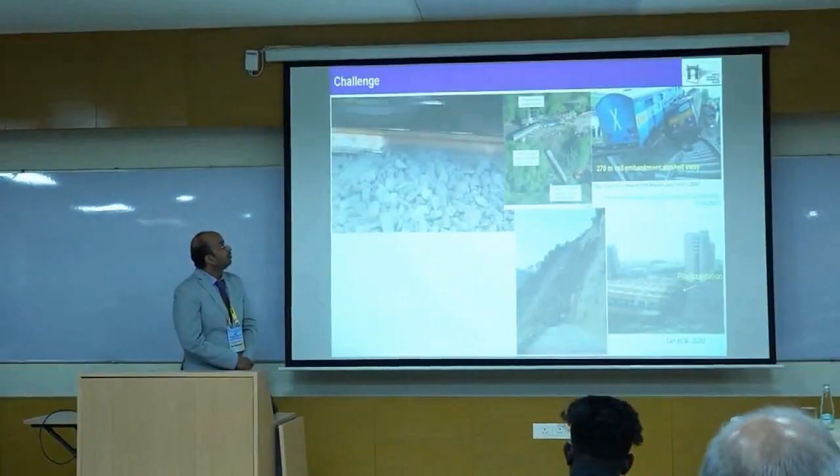There are several challenges when we look into the field related to geoinfrastructure. As you see, when the train is crossing, and here we have the ballast which is fouled, the subgrade soil is subjected to deformation when the train is moving. Similarly, because of heavy rainfall, there was a derailment of Kamayani Express, and there were so many problems that happened in recent years to the performance of various linear infrastructure.

As you can see, because of heavy rainfall, there was a collapse of this particular building where the pile foundation is exposed, and coming from Himachal, we received a lot of landslides, and the frequency of landslides has increased in recent years. We have seen this year as well as in 2023, and these years were never before, when we compare the intensity and frequency of landslides which has increased.

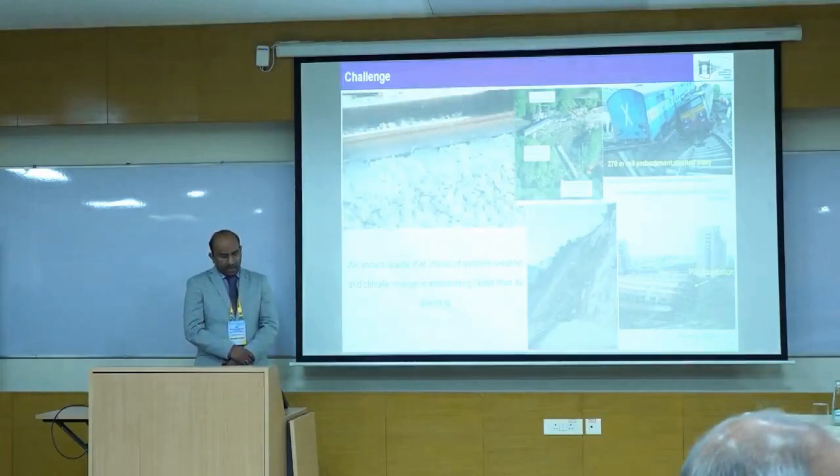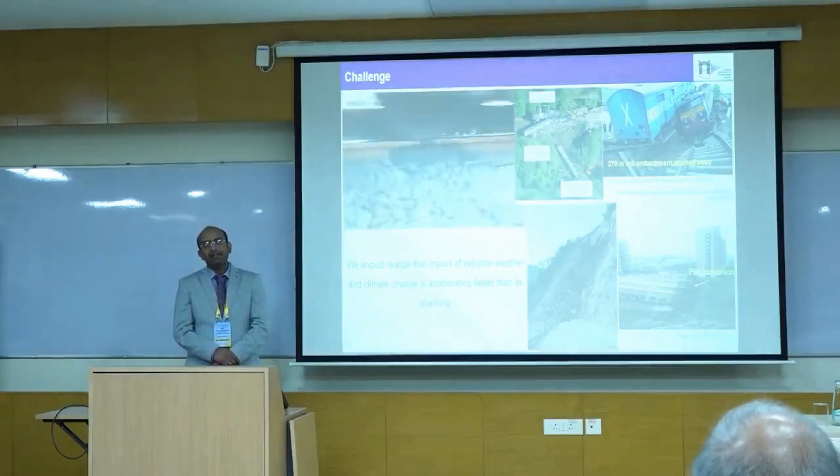So we should realize that the impact of extreme weather events and climate change is accelerating faster than its planning. Therefore, we must incorporate hydraulic loading while designing geotechnical infrastructure.

The way to include it would be through suction, which is the negative pore water pressure present within the soil particle at its contact when the soil is present in an unsaturated state, which is mainly the difference between air pressure and water pressure, when water pressure is lower than air pressure.

It is represented in terms of soil water retention characteristic, as you can see over here, which is the relationship between degree of saturation, that indicates the amount of water present within the voids of the soil, and soil suction. The property of it is highly variable, meaning it depends on how soil is subjected to wetting and drying.

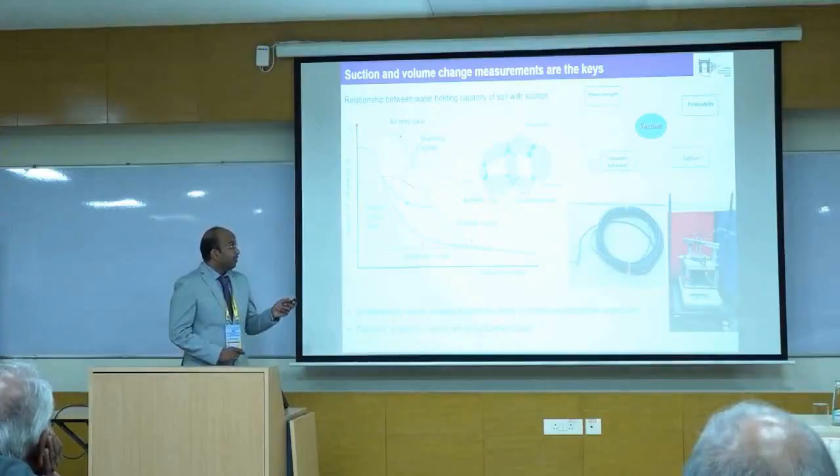Because this particular property of soil, which is suction, affects the strength of the material, its water holding capacity, its volumetric behavior, as well as stiffness, the infrastructure performance gets affected when the soils are present in an unsaturated state and subjected to wetting and drying phenomena.

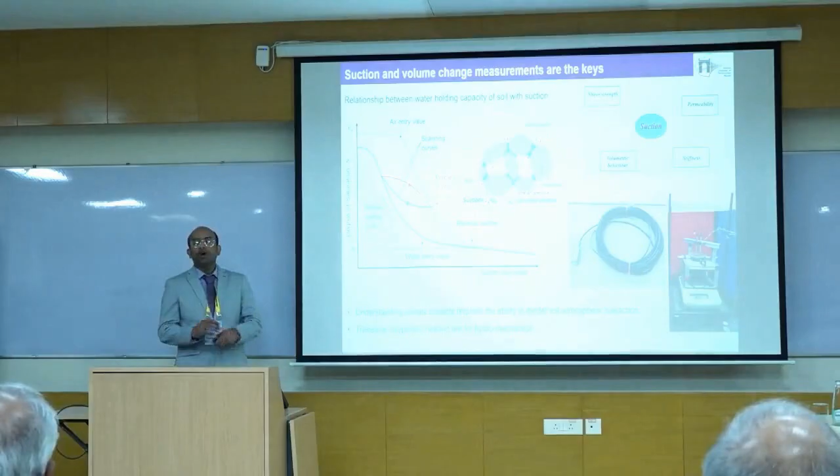The way to measure it would be through this device which is called a tensiometer. This is the device rig that we have developed in our laboratory, aiming to understand the volume change characteristic of the material and measure suction, then represent it onto this space to understand its engineering behavior.

In order to first understand how material behaves under wetting and drying phenomena, combined with the loading that comes because of traffic, for the linear infrastructure it can be mechanical loading, in terms of monotonic and cyclic. We devised the testing protocol where we kept a tensiometer onto the sample, then subjected the soil to different cycles of wetting and drying, and then applied cyclic loading to understand the performance of subgrade soil.

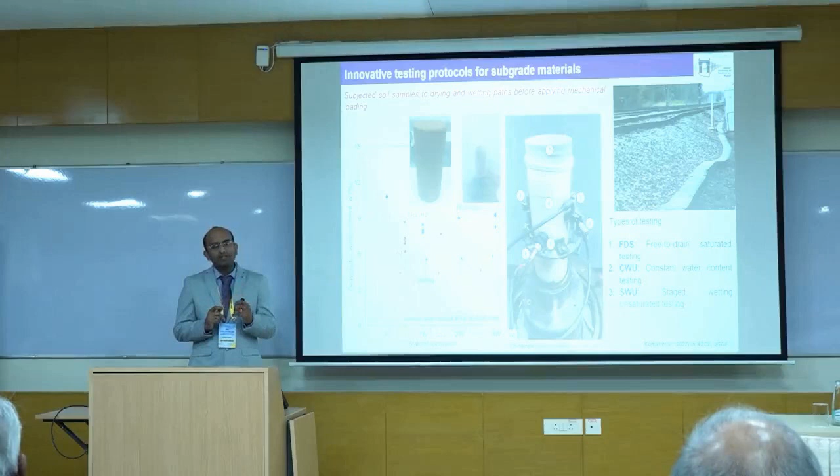We subjected the sample to different levels of hydraulic loading. First was free to drain loading, meaning the samples were fully saturated, voids completely filled with water, and then we applied mechanical loading. We applied another case where we subjected the soil to a constant water content and applied mechanical loading. Then we simulated another condition where we injected water and applied mechanical loading, simulating the condition when rainfall is happening at the same time the train is moving onto the pavement.

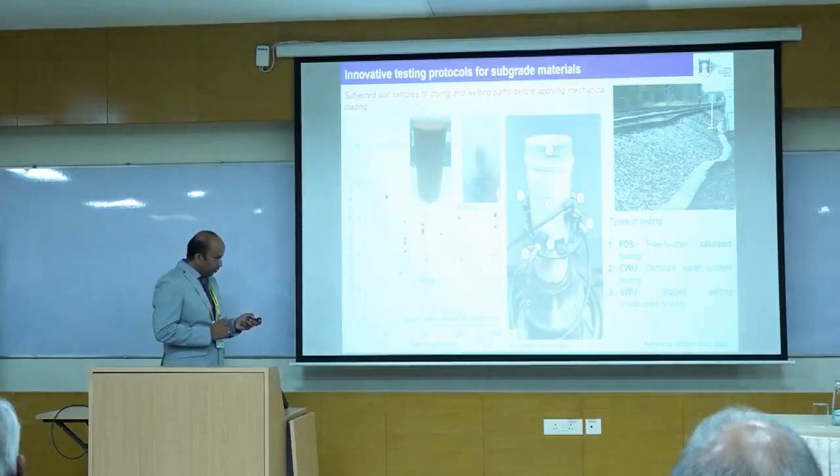With the help of this, we were able to understand that the suction characteristic, which is the governing characteristic of material strength, is not able to fully capture the material behavior. We need to consider the stages of hydraulic loading and how the wetting and drying path is applied. As you can see, when the sample is subjected to different drying and wetting paths, the samples behave differently. This is the result of cyclic loading.

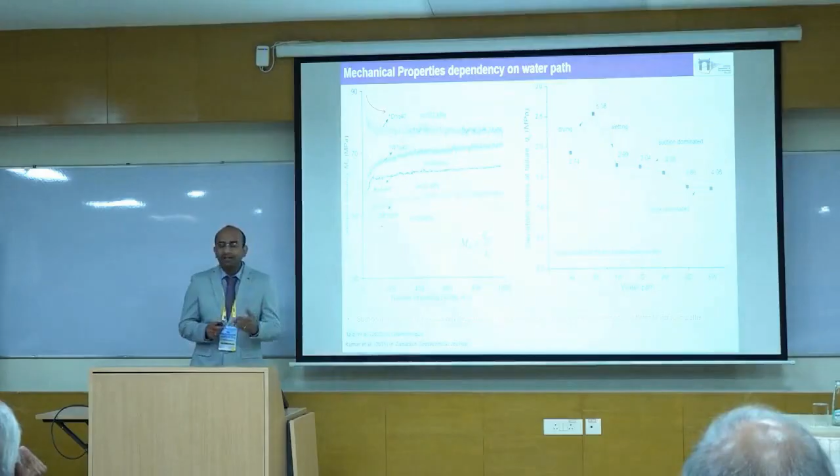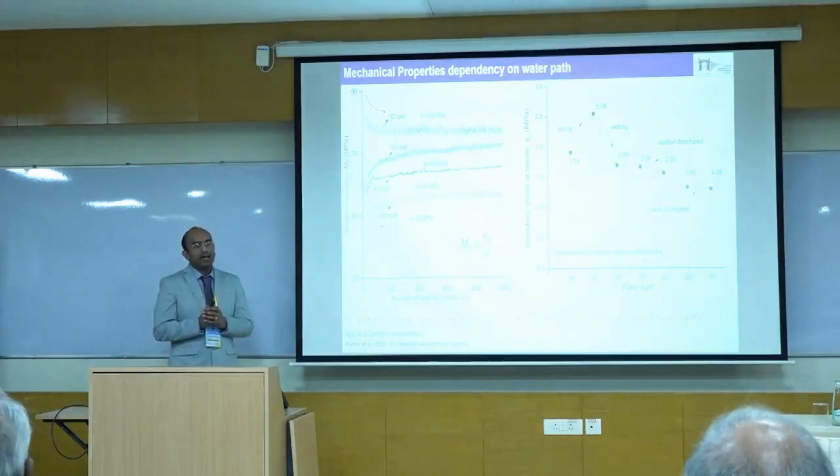When we apply mechanical loading, in terms of monotonic loading, we observe that the sample, when subjected to higher hydraulic path, develops cracks, and this eventually came up in terms of evolution of its deviatoric stress, so it affects the behavior. We need to account for both of these conditions, and we understood that cycles of hydraulic loading affect the behavior of material, whether subjected to monotonic loading or cyclic loading in terms of mechanical loading.

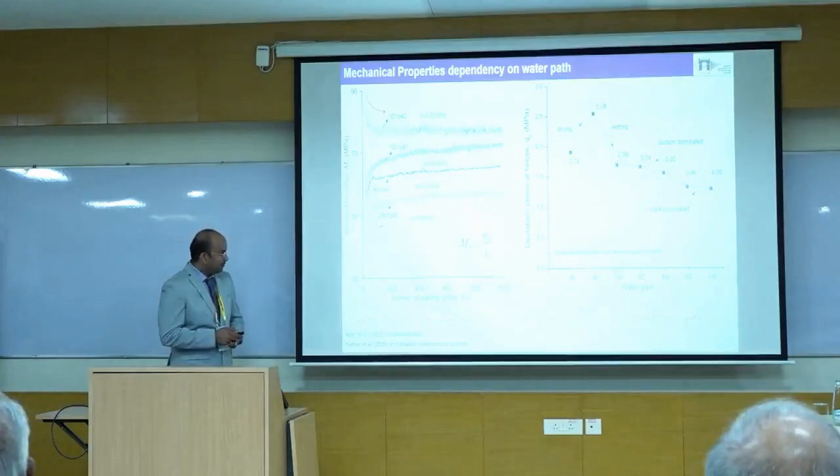In order to understand how we can limit water infiltration within the material, we developed a technological solution. We chose a waste from water treatment plants, called water treatment residue, which has a very high amount of fines. It is high plasticity silt, so we mix it with the soil and place it onto the top.

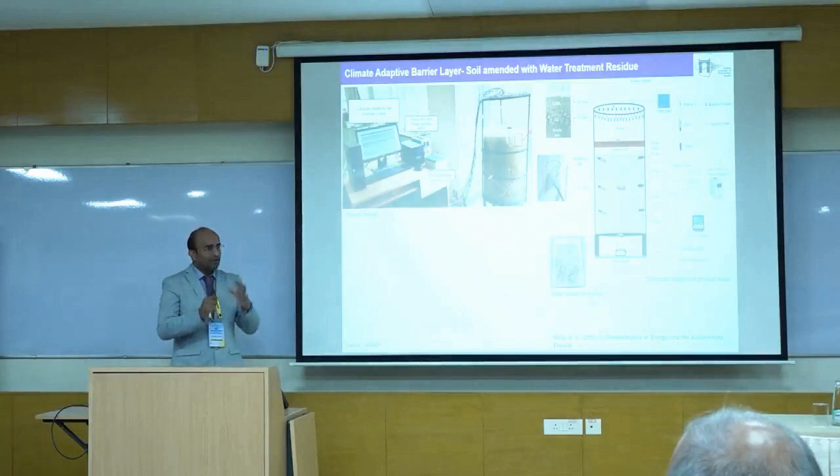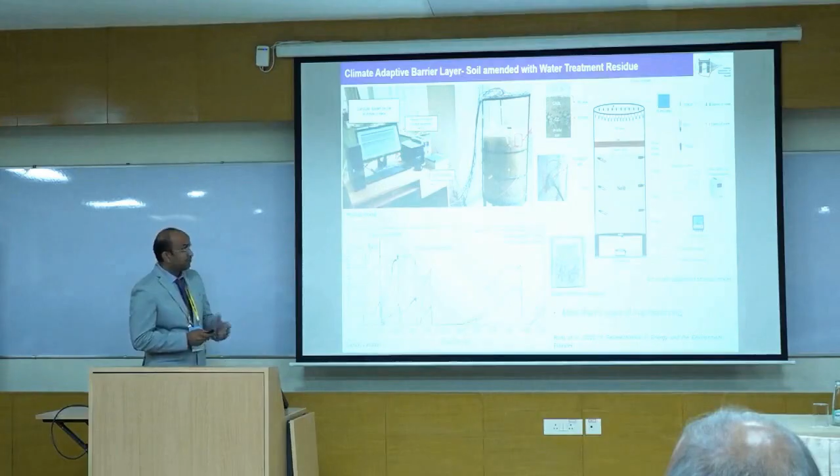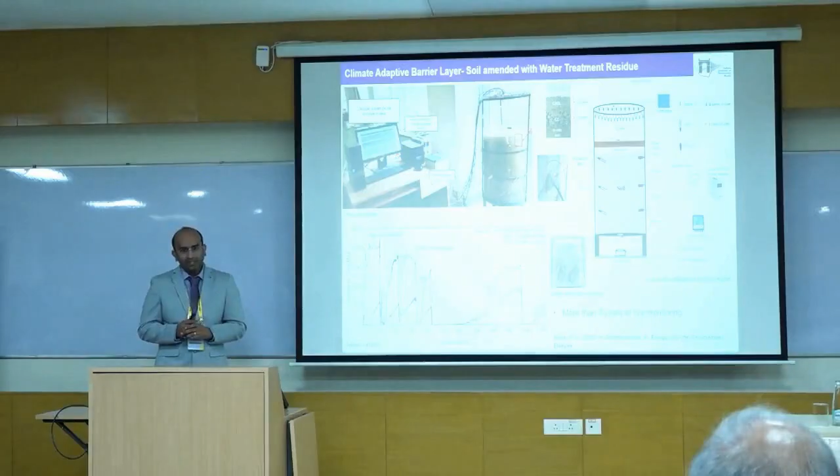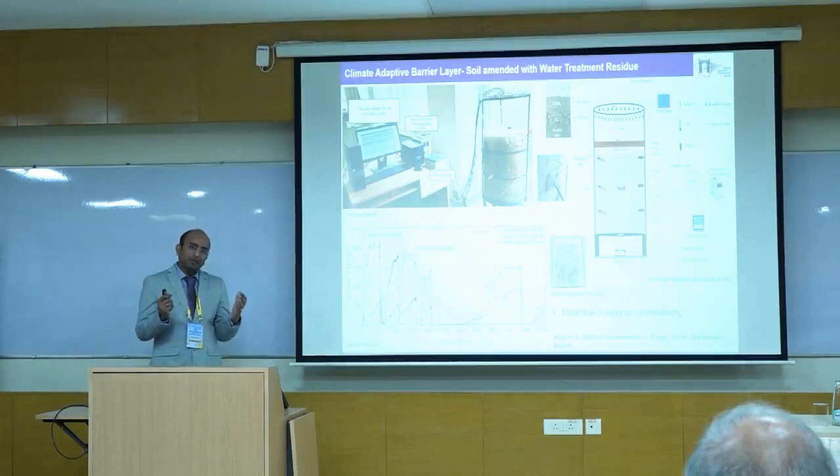Being a high plasticity silt with high fines content, it has higher surface area, so it can absorb water and release it back during drying. We conducted this test for more than three years, and were able to develop a way to control infiltration within the soil. When we control infiltration, we can preserve the compacted state of the material, useful for landslide phenomena or for pavements such as railways and roadways.

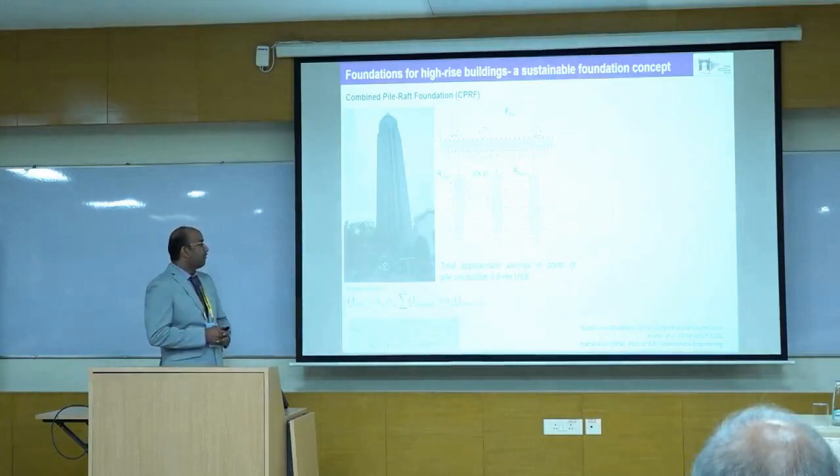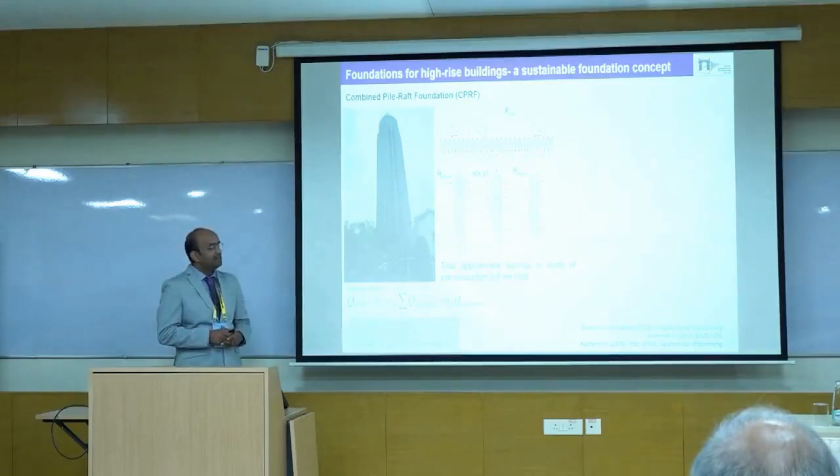Earlier, there was no prediction model to obtain the capacity of this foundation system, where we can get the capacity by obtaining the capacity of a single pile. We have IS code IS 2911 for piles, IS 6403 to obtain the capacity of raft. Through our research, we predicted and proposed an equation to obtain the capacity of combined pile raft foundation systems by proposing interaction factors that govern the load bearing mechanism of this hybrid system.

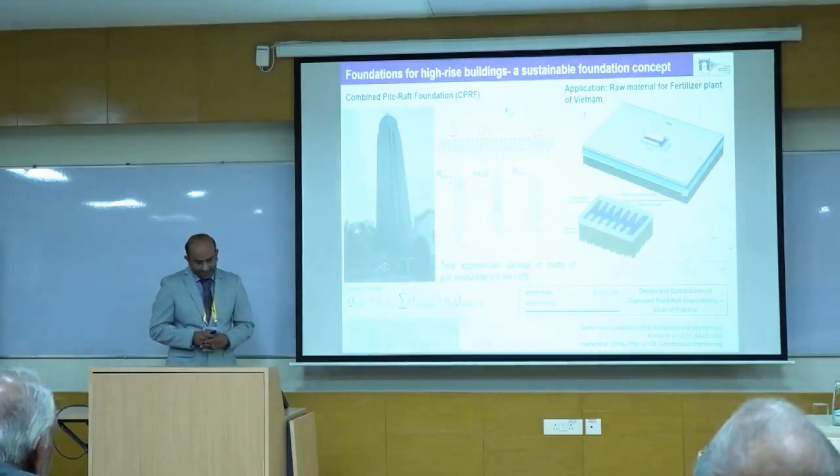We utilized this concept for several buildings. I am highlighting one particular raw material fertilizer plant building in Vietnam. After many years of working in this area, I was fortunate enough to co-author India's first code of practice on design and construction of combined pile raft foundation, IS 19117, recently published by the Bureau of Indian Standards.

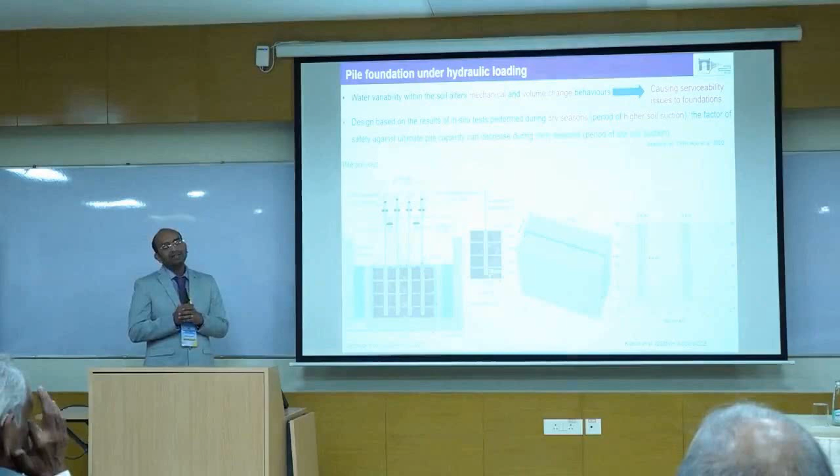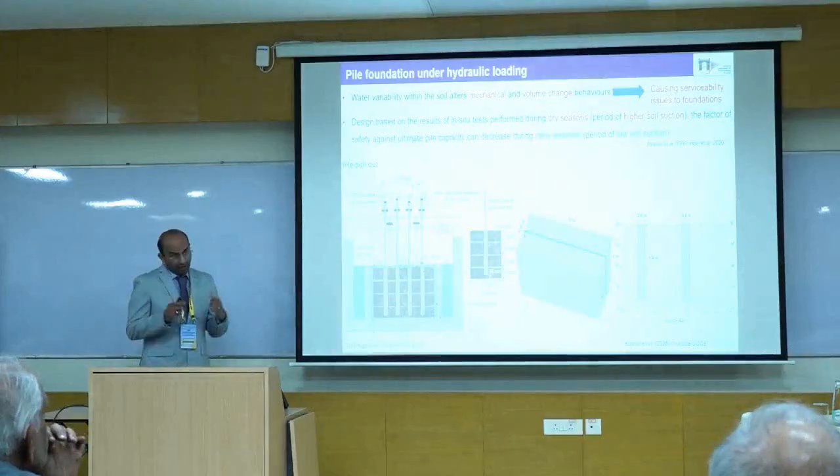Then we tried to understand how this foundation responds when subjected to wetting and drying. We subjected the pile foundation to different conditions - one being groundwater abstraction, another rainfall infiltration. We found that groundwater abstraction or addition helps build significant additional load onto the pile foundation, and that needs to be accounted for.

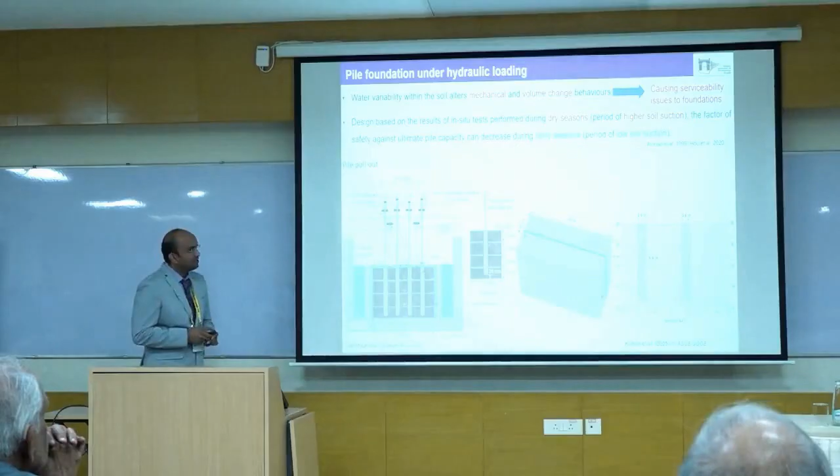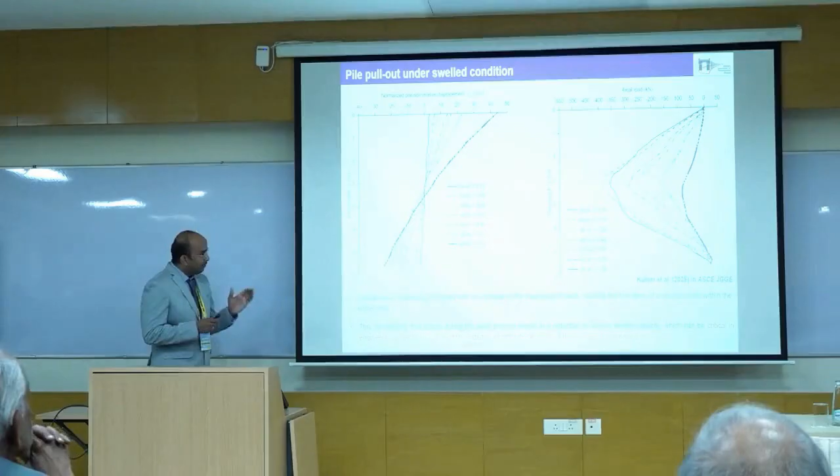We considered the case of a freestanding pile, where when the ground moves up, it tends to move the pile up from the top, then pull the pile down, creating significant tension in the pile. We highlighted that this loading consideration, not considered until now in design, must be accounted for in lightly loaded structures. We also developed a physical model at IIT Mandi to understand water migration.

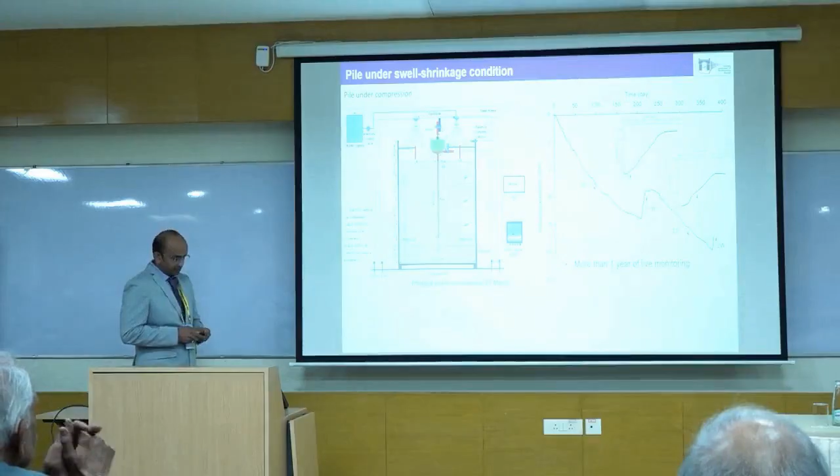When water migration happens, we study how wetting and drying phenomena affect the performance of the pile. We currently have one year of monitoring. We are trying to understand the load bearing mechanism of the pile, which can eventually contribute to the practice of pile foundation design, which is yet to be established.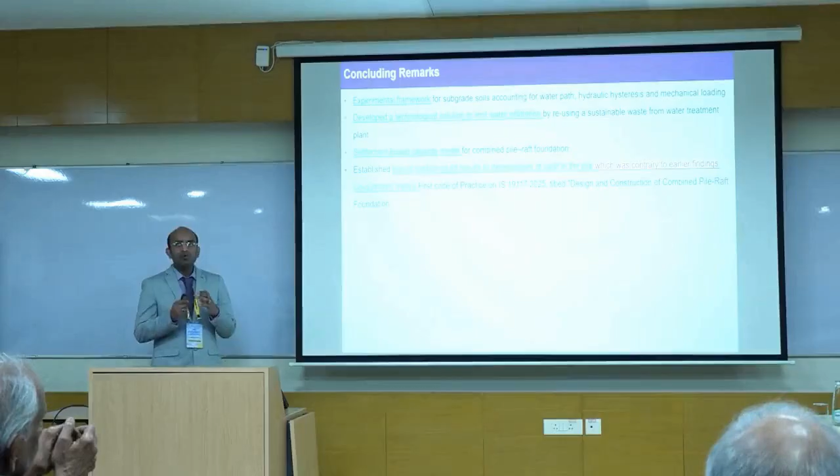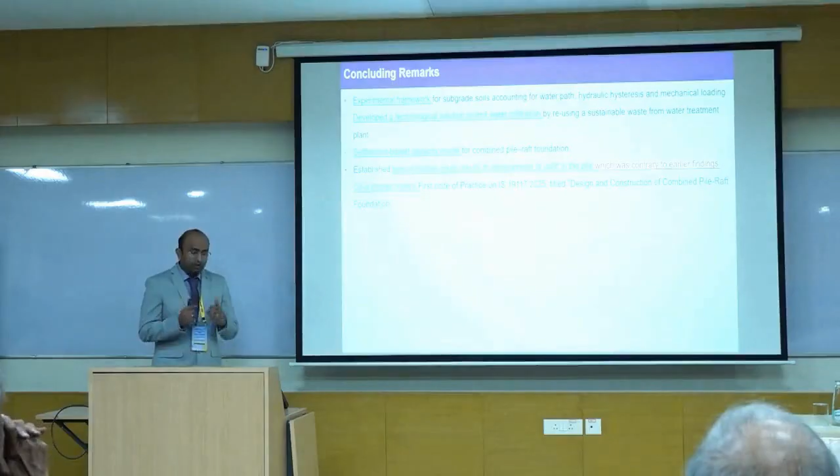Coming to my concluding remarks: through our research, we established an experimental framework for subgrade soil, including water path, hydraulic hysteresis, and mechanical loading. We developed a technological solution to limit water infiltration. We provided settlement-based capacity for combined pile raft foundation, and accounted for how changes in soil suction and volume can cause uplift or tensile forces on the pile, contrary to earlier findings. We also co-authored India's first code of practice on combined pile raft foundation systems.